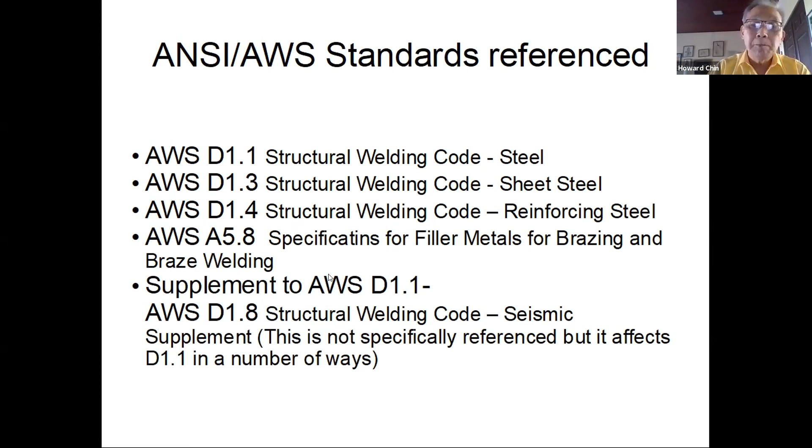This is from the IBC, International Building Code itself. This is a page around the back where it says reference standards. These are the AWS sections that are referenced. This part for the International Building Code is the structural parts: the steel welding, sheet steel, and the reinforcing bar.

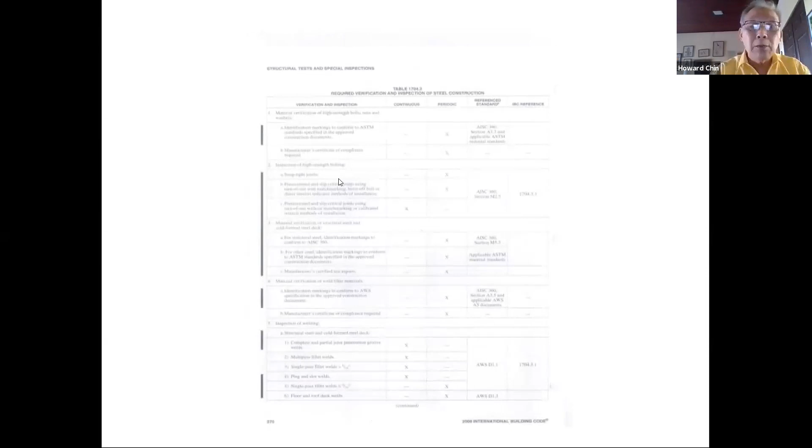The next page, this is from the body of the standard, where it calls for the reference. This is for sheet steel. The next one, if you look at the middle left, you'll see the structural steel requirement is there, and for the cold form steel and the reinforcing bar.

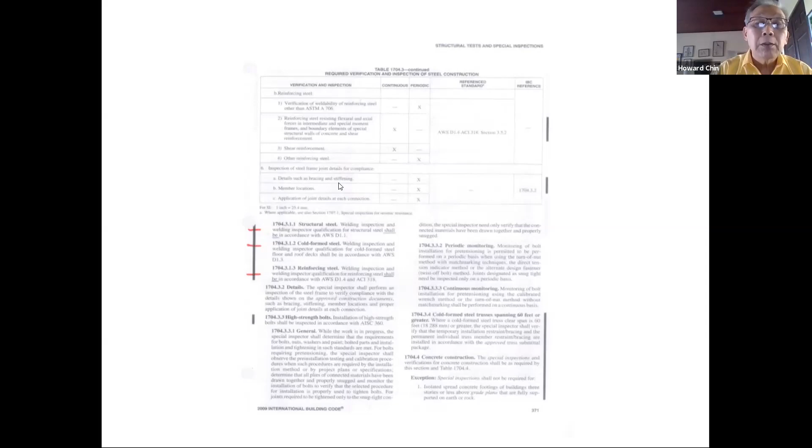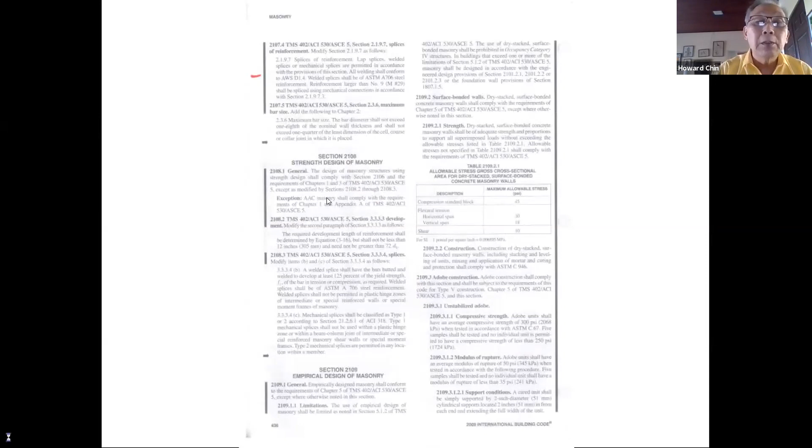Now, the other parts here, you have the reinforcing thing again on upper left. This is from the body again of the building code, IBC. And here we go into the International Mechanical Code. Oh, hold on, what is this? Okay.

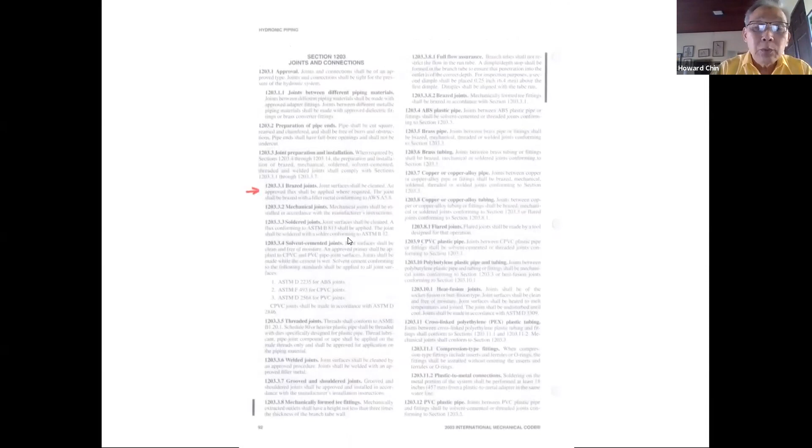It is used for braze joints in piping and tubing, but we're not really going to be looking at that too much. The next one is fuel oil piping and storage. You can see in the lower right-hand corner, braze joints.

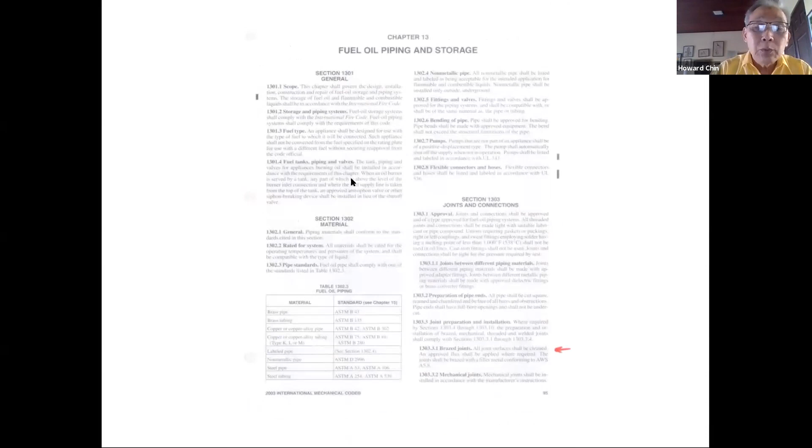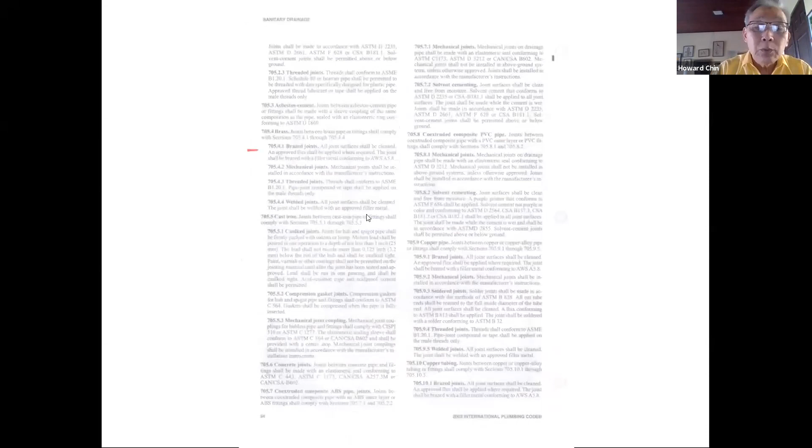Okay, now what are the consequences of this? The IBC calls for verification and inspection, and this requires certified welding inspectors, of which we have one, oh no, two at this time, possibly later three, if Dwight Lewis tests and becomes successful as a CWI. But the main thing here is that all of these forms here...

Structural steel, cold form steel, and reinforcing steel all say shall be in accordance with the relevant AWS standard. And as a part of that, the welders have to be tested as well to be able to do the jobs that are required in the various codes.

We're not going to have more cobblers around anymore. One of the things that happens is that right now in structural welding, a number of welders are tacking things onto the steel in all sorts of places, which is not necessarily accepted by the D1.1 structural welding code, because this can cause problems later on in the operational life of the building or structure. So there are a number of restrictions that will occur.

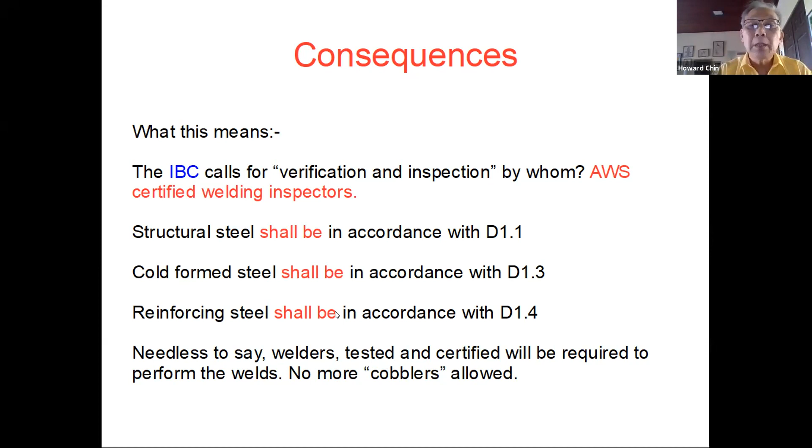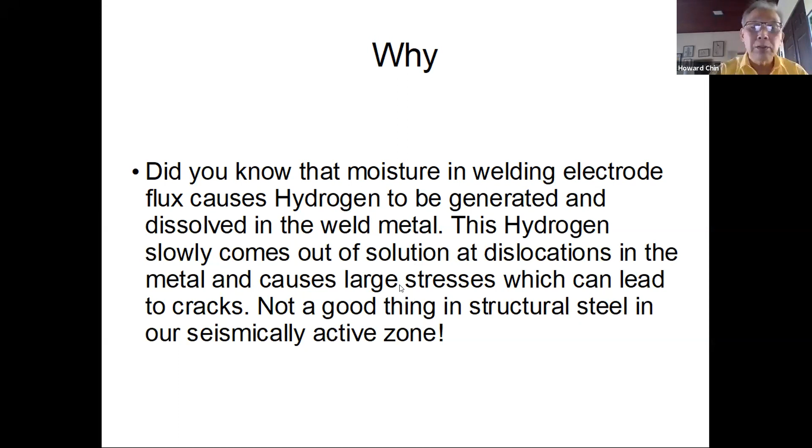One of the things that goes on there is hydrogen comes from moist welding electrodes, and this comes out at dislocations in the metal, and that is not a good thing in structural steel in an active seismic zone, which we're in.

Now the lessons to be learned from this are that over the years, D1.1 has grown physically in size. In 1988, it was 22 millimeters thick. 1989, 30 millimeters thick. And getting closer to the current day, 37 millimeters thick. And then you add on a mere 9 millimeters of seismic supplement.

Now the thing is, why is this? Earthquakes such as Northridge in California, hurricanes, and other problems that we've had cause changes in the building code.

Now one of the things you have going on is, for instance, I don't know if the current engineers in structures are using the dog bone treatment for beams. I don't know if any structural engineers are here. Anyone?

You can type in the chat if... I'm not seeing that, no one. Well, anyone? Maybe you could do, typing it in the chat. But you can continue in the meantime. Well, okay, that's the seismic problems for...

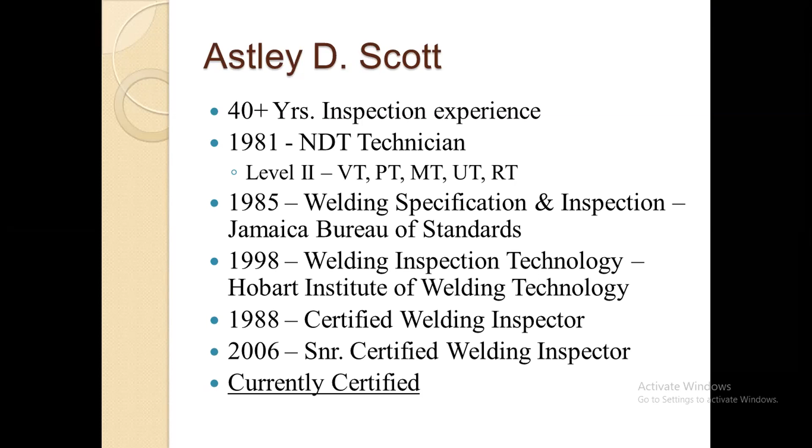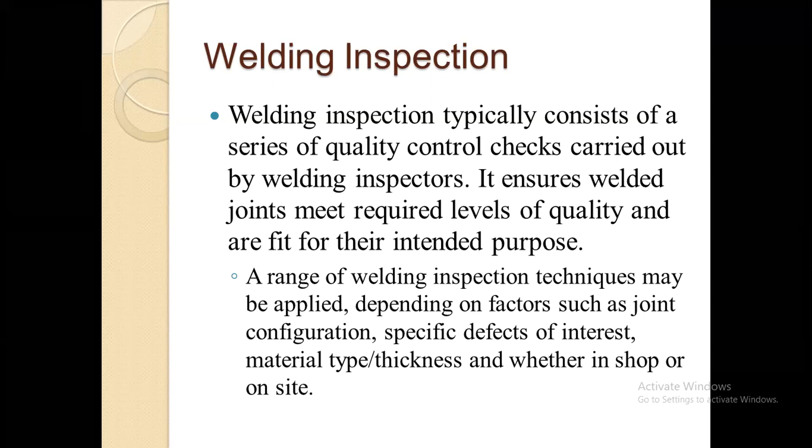Welding inspection typically consists of a series of quality control checks. These ensure that the welds are done to the required quality and are fit for the intended purposes. To achieve this, different welding inspection techniques may be applied depending on the joint configurations, the specific defects inherent in the type of material being inspected, the service, material type and thickness, and whether the welding is done in a shop or on a site which may have different kinds of contaminants.

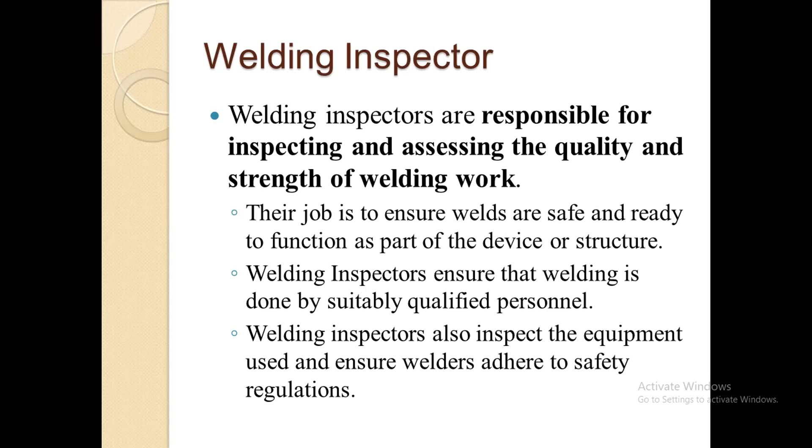A welding inspector is responsible for the inspection and assessment of the quality and strength of the welding work. The inspector has to ensure that the welds are safe and ready to function as part of the structure, and that the welding is done by suitably qualified personnel, done to the specifications approved for a welding project. Welding inspectors will also inspect equipment to make sure the right kind of equipment is being used, and ensure that welders adhere to all the safety regulations.

There are three different levels of welding inspectors: senior certified welding inspector, certified welding inspector, and as a subheading, certified associate welding inspector. I put that as a sub because there's not a separate examination for a CAWI - you become a CAWI when you sit the CWI examination and pass, but at a lower level than required for the CWI. Then you are known as a certified associate welding inspector, meaning you can do inspection, but you have to do it under the guidance of a certified welding inspector or a senior certified welding inspector.

You always have to be within sight or within earshot of a CWI while you're doing your inspection, if you're an associate inspector. That's a requirement. And these different levels are achieved through education, experience, training, and examinations.

Inspectors are really required to remain current, even though there are some codes which will allow the contractor to optionally use inspectors that are not current but have been certified in the past.

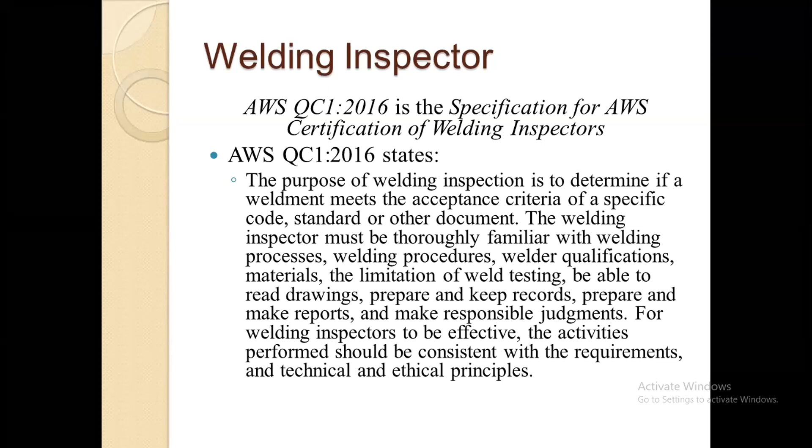It further states that the inspector shall act to preserve the health and well-being of the public by performing duties required of welding inspection in a conscientious and impartial manner to the full extent of the inspector's moral and civic responsibility and qualification. AWS is very serious about this, to the point where an inspector can lose his or her certification if it is proven that they have breached the ethical standards required for welding inspectors.

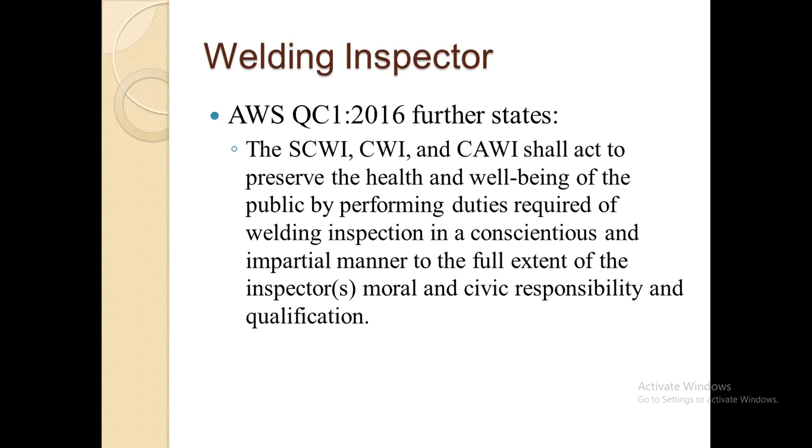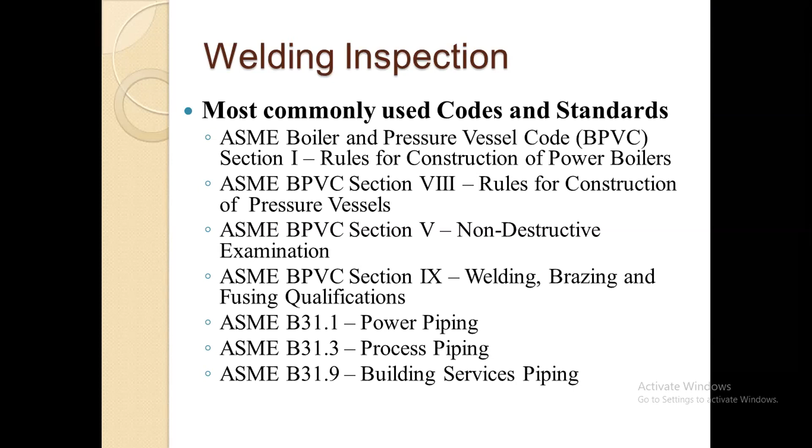Section 5 is widely used in non-destructive examination, that's one of the types of tests that uses welding. We have section 9, which is a qualification code that addresses welding, brazing, and fusing qualifications. There's B31.1 for power piping, B31.3 for process piping, and what would probably be more interesting to you is the B31.9, which is the building services piping.

Continuing, there are some API codes as well, which are widely used right here in Jamaica. API 1104, which addresses pipeline welding. The API 650, the welding of oil storage tanks. 653 has to do with the repair and alteration of storage tanks. And the API 510, which is the API pressure vessel inspection code.

And even though these codes are primarily for the oil industry, you will still find that API 650 and API 653 are widely used in other tank constructions as well, because similar rules would apply.

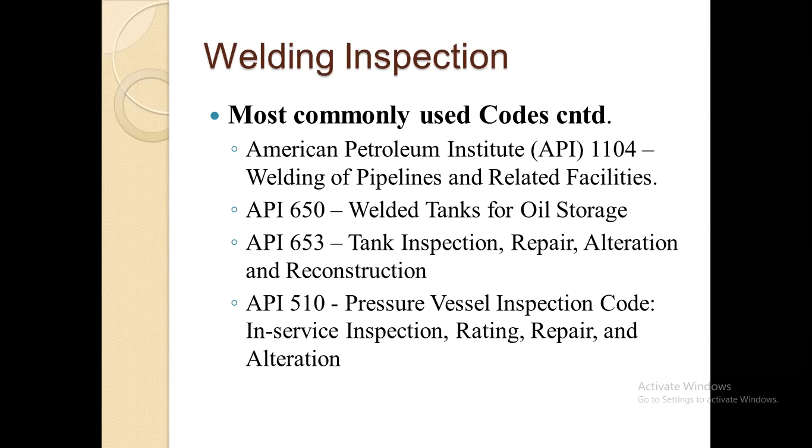To get closer to what we are about, now we have the AWS codes. There's B2.1, which is the specification for welding procedure and performance qualification. This is the AWS equivalent to section 9, which is a qualification code. There's the D1.1, the structural welding code for steel, and Howard mentioned the D1.8, which is a seismic supplement.

There's the D1.2, structural welding of aluminum, 1.3 for sheet steel, 1.4 for steel reinforcing bars. There's the D1.5, which is the bridge welding code. And the stainless steel code is the D1.6. The D1.7 is a guide for strengthening and repairing existing structures.

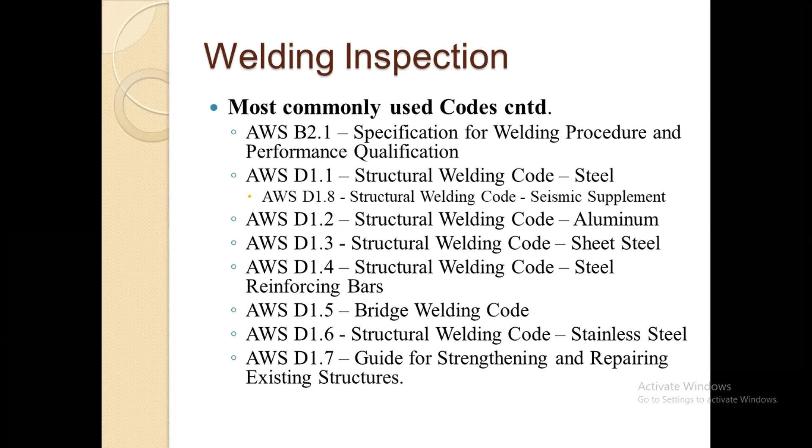I mentioned earlier that there are some things that will need to be in place whenever a weld is to be done. It should be in place first. Now I have here listed some important documents. The very first document here is the welding procedure specification.

This is like a menu, or rather a recipe as to how you're going to do the weld. So it states what material is being welded, how it is to be welded, the different current, the different positions, etc. And these have to be followed throughout a welding operation for a specific project.

Now, the procedure qualification record is a test that is done to ensure that the WPS can fit the requirements of a specific project. And then there's a welder performance qualification, which is a test done to ensure that the welder or the welding operator can use the welding procedure specification to achieve the quality welds that are needed for a specific job.

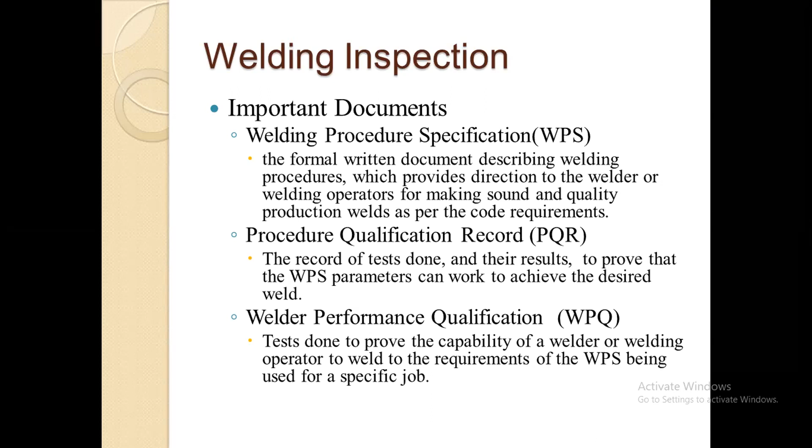While the code does not mandate the exact format for these documents, they do have some suggested formats. If you move away from those formats, you still will be required to make sure that all areas that are covered are also covered in the format that you are using. So all essential information required for a WPS, a PQR, or a WPQ has to be in whichever format you use, even if you put them in a slightly different order than the suggested format. They really call them suggested formats because no one is tied exactly to that.

There are some codes, especially the American Welding Society codes, which allow for the use of pre-qualified welding procedure specifications. These are WPSs that the American Welding Society has gone through all the testing processes for. For each one, they probably have 20, 30, 40 different PQRs that they've done before getting to the final document. These they sell to industry, which minimizes the number of WPSs you have to do on your own. But there's a requirement that when you use these pre-qualified codes, you have to test them to make sure you're able to use them as they've been designed.

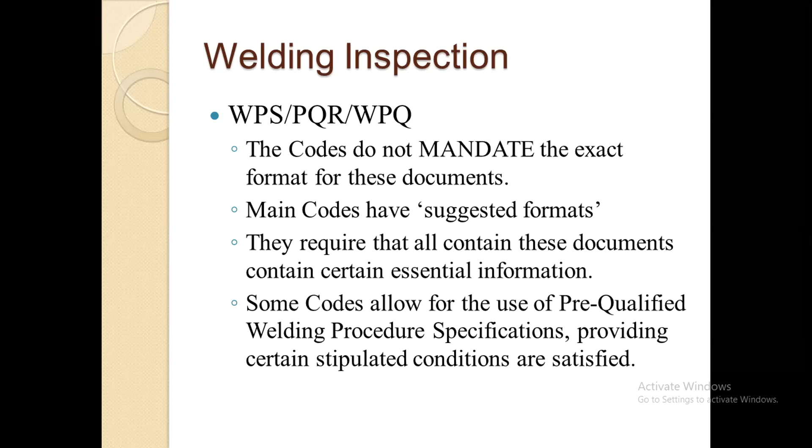I have here a list of the different suggested formats from ASME and AWS.

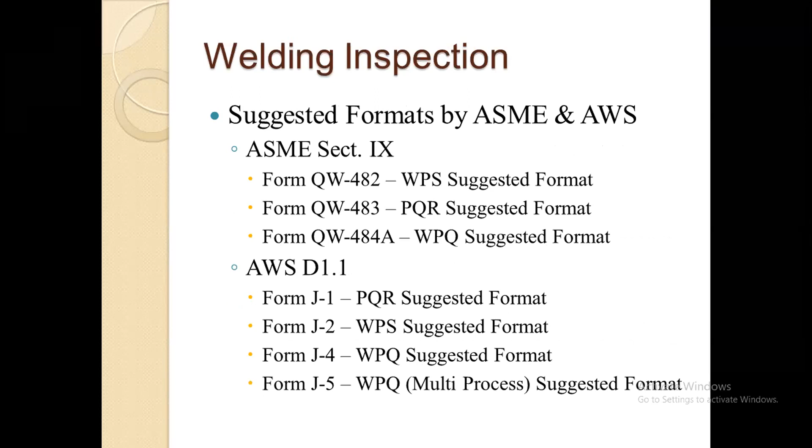In welding inspection, there are two different types of tests that are done: destructive tests and non-destructive tests. The destructive test, when done, renders the sample unusable afterward. Tests such as the tensile test are mainly used when qualifying welding procedures - you prepare the sample and pull it to breakage until it fails, and you make a recording of what is done. There's also the bend test, used in qualifying welding procedures and also in qualification of welders. And there's a Charpy test, which we don't normally use in our area - it's mainly used in the very cold regions of the world.

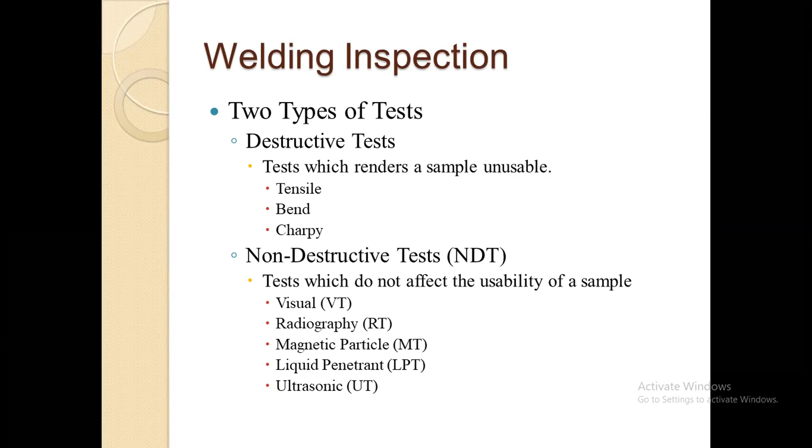There are also non-destructive tests, which do not affect the usability of a sample after testing. These include, but are not limited to, visual testing, radiographic testing (which we popularly call X-ray), magnetic particle testing, liquid penetrant testing, and ultrasonic testing. All of these are different NDT tests commonly applied to welding.

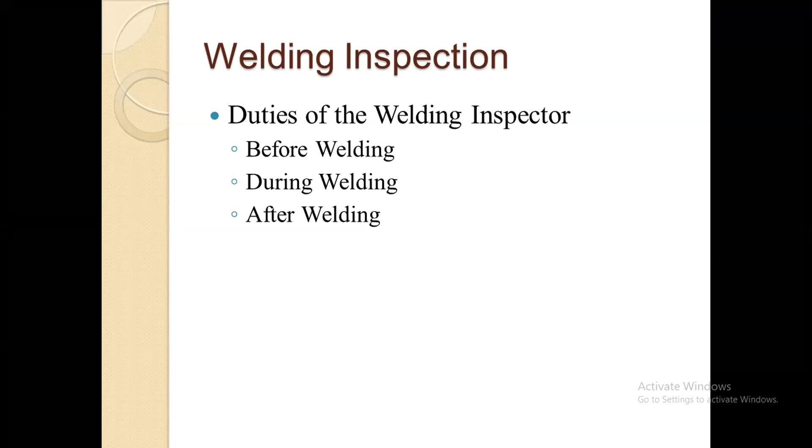The welding inspector has duties before welding actually starts, during the welding, and after the welding process has been completed. Before welding, the inspector has a responsibility to verify that the correct material is being used in accordance with the WPS and the design drawings, and that the materials are traceable through the use of test certificates. The materials here are not just the material to be welded, but also what you're using to weld, which are filler materials. The inspector also has to make sure the materials are free from damage and contamination.

The inspector has to make sure that the WPS to be used is suitably approved and is available to welders and inspectors. I'll expand a bit more on that, because I have found in so many occasions a WPS is prepared, tested, qualified, and approved, and then it sits on a desk in an office, and the people out in the field doing the work never ever see it. It's like sending your cook out to cook something, or your baker to bake something, while keeping the recipe hidden from them. You're leaving it to chance. The WPS really should be available to the welders, the inspectors, the supervisors - all who are directly involved with the welding process - because this tells them what they are to do, how they are to do it, and often what the desired outcomes are.

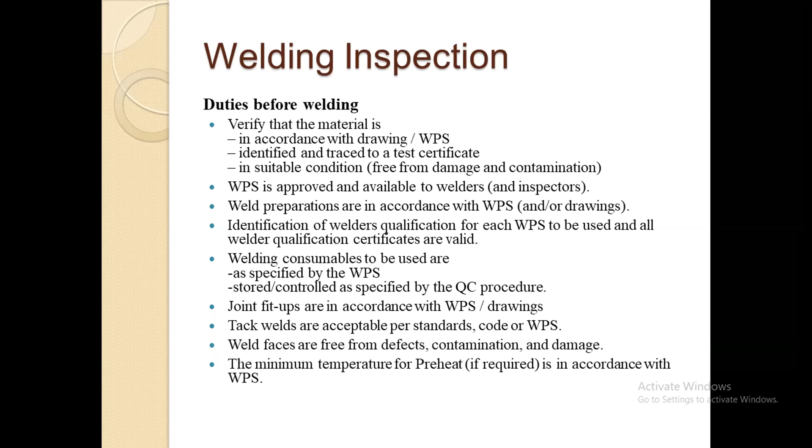So the inspector has a responsibility to make sure that what is being used is being stored and controlled properly. The inspector has to check the joint fit-ups to make sure they are in accordance with the WPS and the project drawings, that the tack welds are acceptable and up to standard, and that the weld faces are free from defects, contamination, and any damage. The inspector also has to make sure that, where required, the preheat and interpass temperatures are maintained within the required ranges.

Duties during welding: the inspector has to ensure the weather conditions are suitable. Just two days ago, I was testing some welders at a facility. They were working outdoors and it got very windy. I had to stop the test and move it indoors. There are some conditions you don't want people welding under, and this is not just limited to wind, but certainly includes rain.

The inspector has to ensure that the entire welding process is in accordance with what is specified by the WPS. Remember, the WPS is the document that instructs the workers how the weld is to be done. The preheat has to be checked to make sure the minimum preheat temperature is maintained. The interpass temperature, where specified, is to be checked and maintained. The welding consumables must be the right ones and controlled as required.

The welding parameters like current, voltage, and travel speed must be within what is permitted by the WPS. It's not what a welder thinks he should use based on his experience, but what the WPS specifies as the range for that size electrode. So that is what has to be used. The inspector also has to check the root run to make sure it is acceptable before the weld is continued.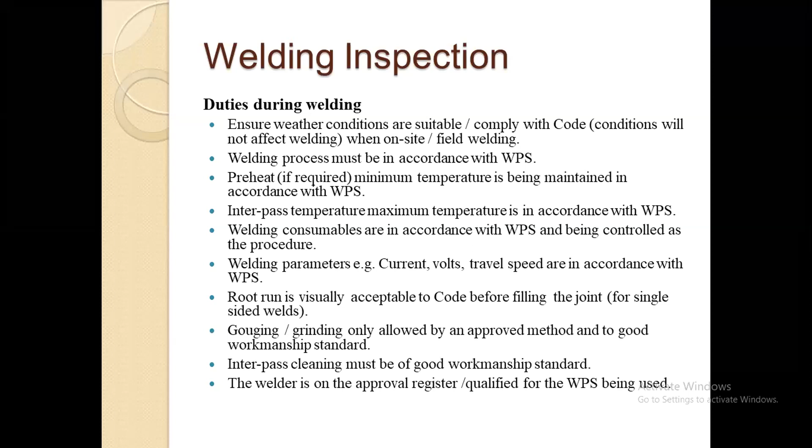After welding, and some of this may take place during welding as well, each weld is to be marked for identification. We don't practice that a lot, but it is good for traceability, because you don't want to find, after a job is done, that ten joints failed and you don't know who did them. It might be one welder responsible for all of this. So this is important for contractors to know, and this kind of record must be kept.

Inspectors ensure that the weld appearance is suitable for all NDT, the profile is correct, the cleanliness is okay, and the inspector has to visually inspect and assess all welds, because they don't go on to further NDT tests until they have passed the first and most important inspection procedure, which is the visual inspection.

The inspector has to check and ensure that the dimensions are in accordance with the drawing and the code. The drawings will specify certain weld sizes and profiles, and sometimes how the profile should be finished. So the inspector has to make sure that all that is being done is done according to what is in the drawing and what is allowed by the code.

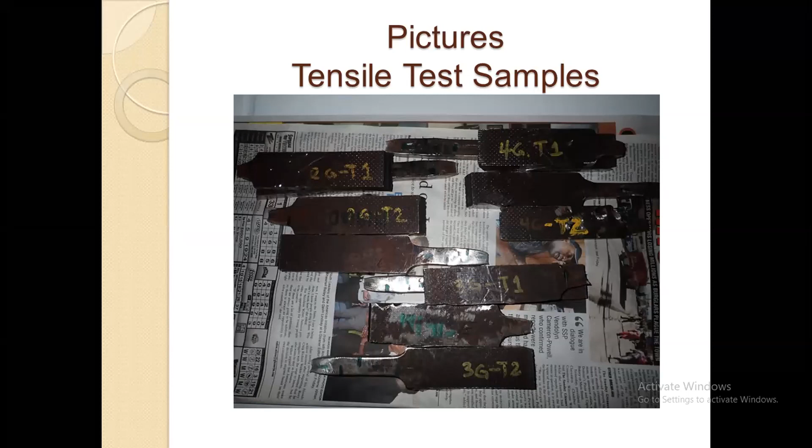These are pictures of some local things. This is a picture of some tensile testing that I had done in preparing a welding procedure for a local contractor. The tensile testing was done at the Bureau of Standards.

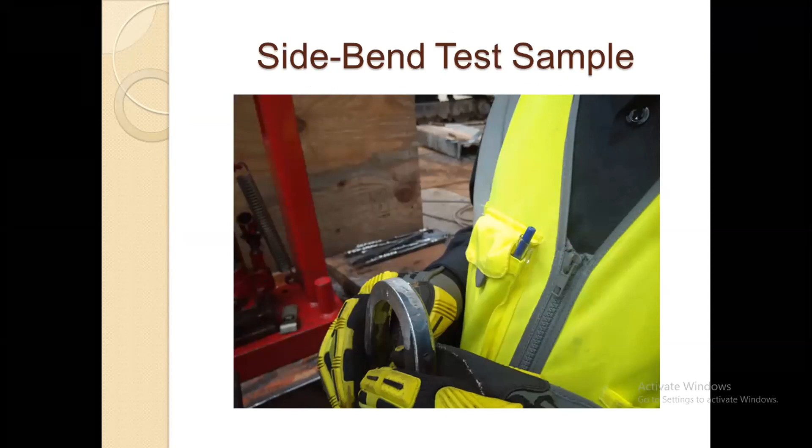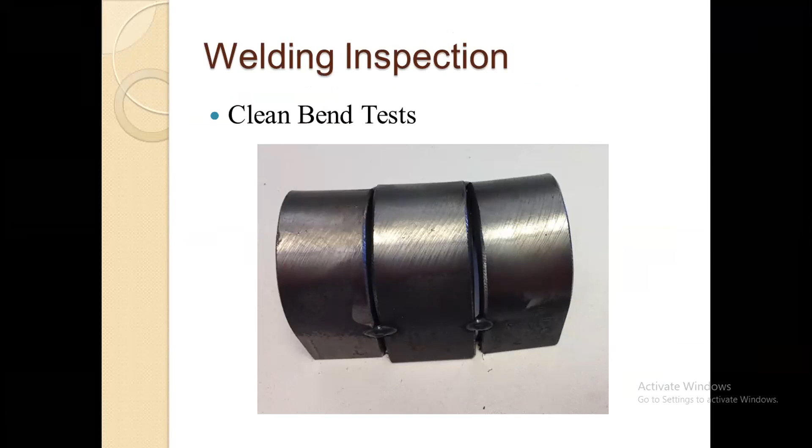This picture shows me looking at a side bend test that was done locally as well. This is not a local image, but this is what a face and root bend transverse bend test looks like, and this is used for the qualification of welders. This is me as the inspector, and another inspector.

This inspector is from Venezuela. We're doing some measurements and some welding tests. It was some submerged arc welding test that was done, some fillet weld tests.

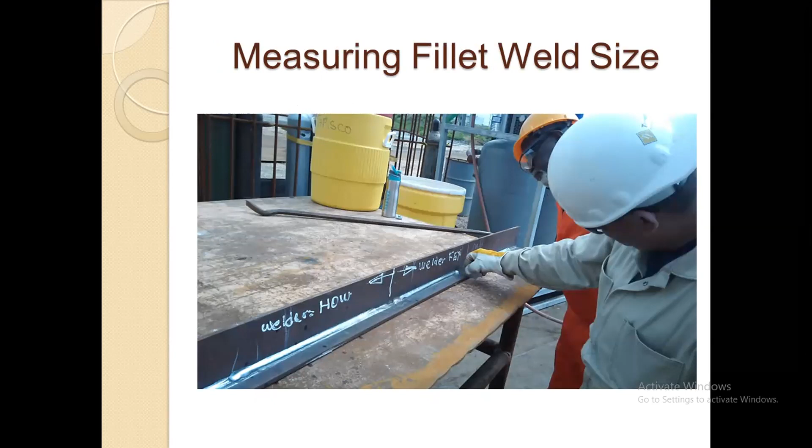Let me just move on. This is some welding that was done at a project in Montego Bay, and some NDT was done. You're not seeing it clearly on the image, but the arrows are actually pointing to the cracks that were shown up by the NDT that was done. Magnetic particle testing was done in this case.

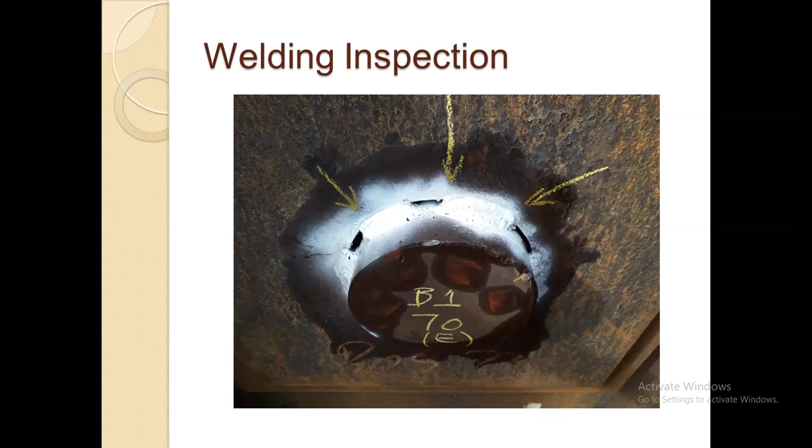You can see it a little clearer there now, that red line, which is the crack zone.

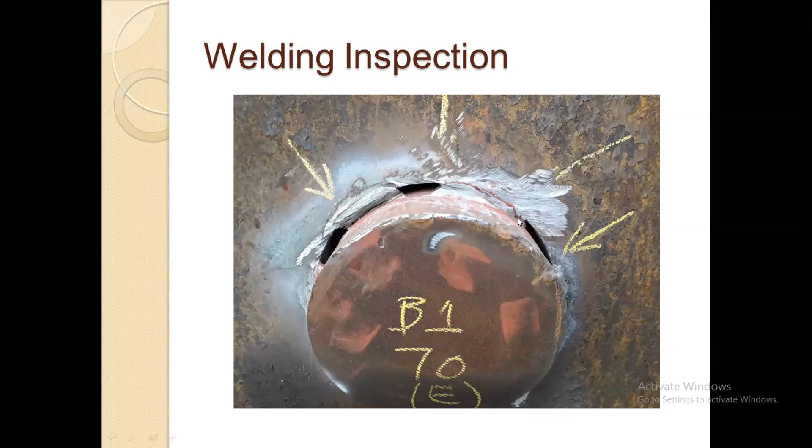Now, what we have here is a building that went up. The owners noticed some things that they did not like, and they asked for inspection to be done. And this resulted in almost all the welds having to be done over. The welds, this was for a roof support structure of a building here in Jamaica.

Normally, just walking by, you wouldn't be able to see these kind of defects. A lot of the welds were done locally, most of them. Some were done overseas and sent here, and even those had to be done over, not entirely, but the majority of them were smaller than the size stipulated by the drawings, and the quality was another problem.

I'm sure you can see. Well, Howard mentioned something about cobblers. That was probably done by one of those type of persons. But we won't get away from it unless we have the inspections done.

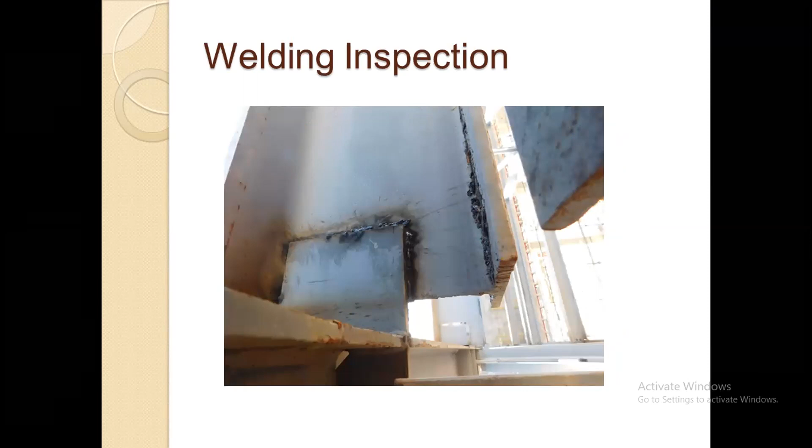A lot of these things would have gone unnoticed because it's all the way up here in the roof structure. Nobody walking down, and once they are finished, they would put up the ceiling, and nobody is the wiser that this is what is holding up the roof. This is the kind of thing that was happening.

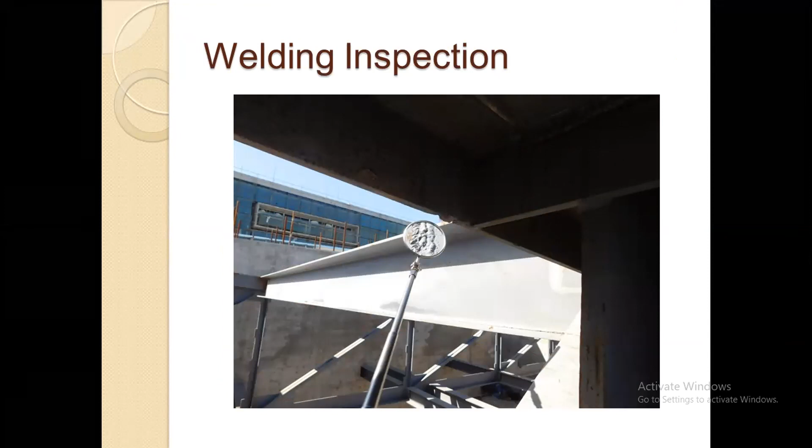Very bad. I won't say what project it is, because it's a project right here in Jamaica. But as I said before, the majority of welds had to be done over. They were done over by a local contractor.

In this case, this was supposed to be a beam that was to be spliced, and they didn't fit it properly, so there was excess space, and they used rebar to fill the space and then weld around the rebar.

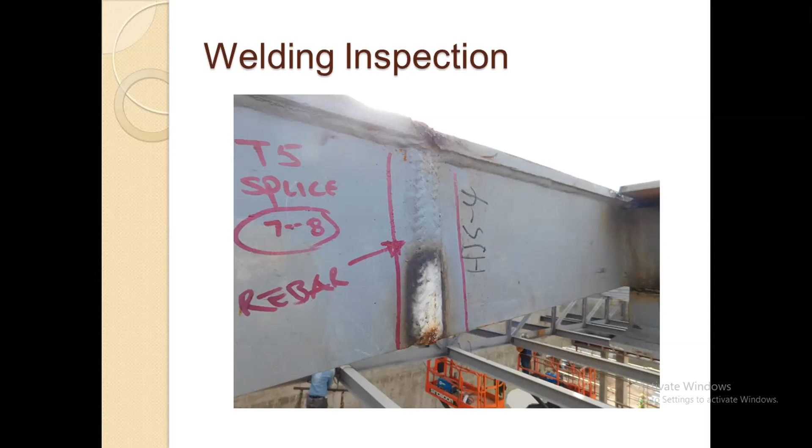And again, this was all the way up there. You would normally never see this. And all this could happen because there was not a welding inspector on the job who was there monitoring what was taking place. The welding inspector in this case was only called when someone noticed something awry.

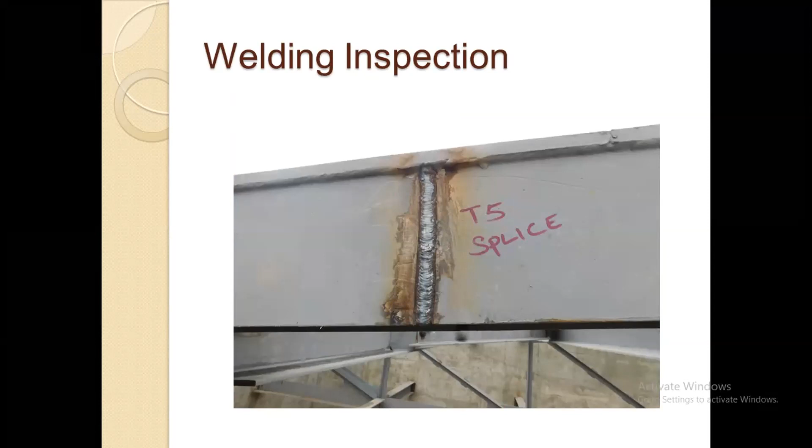This is one of the joints that was done over by our local welders. And the fact that I said local should make you realize that a lot of the welding was not done by local people.

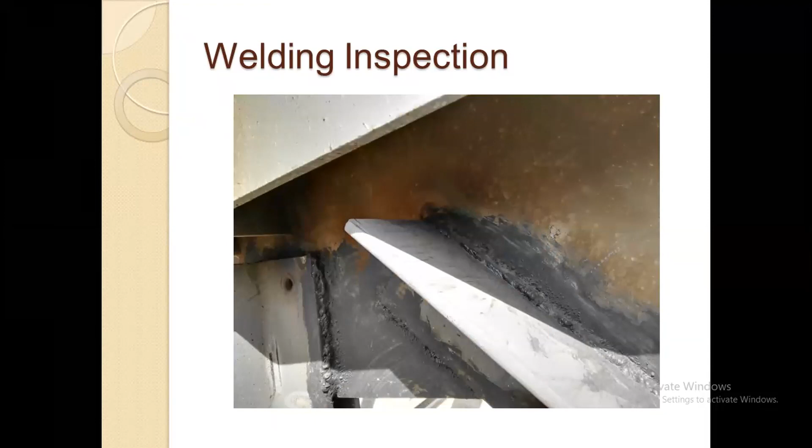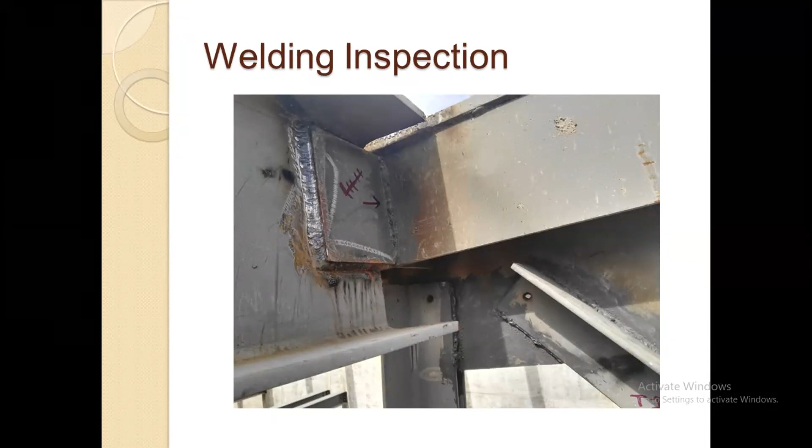This is the kind of thing that was happening. This weld was a weld that was done over as well by our local people. You see the red arrow there pointing to another part that still needs to be done over. The weld was below the specified size, and the profile was not of the profile that is acceptable.

And you will see some of these welds were actually already painted. So they were all completed as far as they're concerned, ready to put up the ceiling to hide all of that. And remember, as Howard mentioned, we are in a seismically active zone.

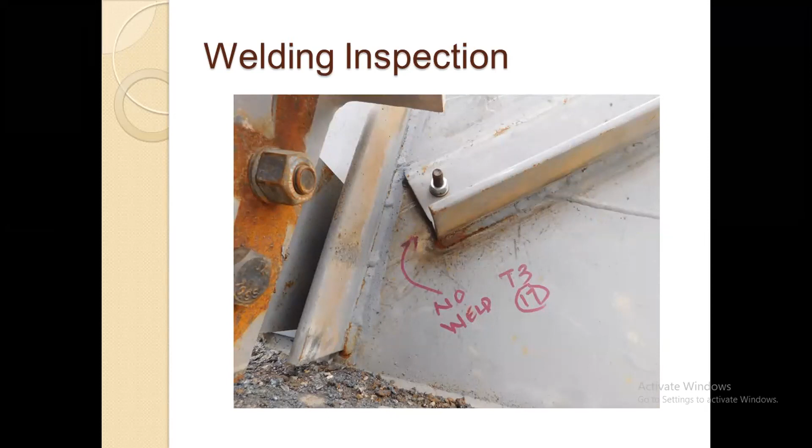The arrow is pointing to a part that the drawing says should be welded, but they welded the two sides and did not weld the end as required by the drawing.

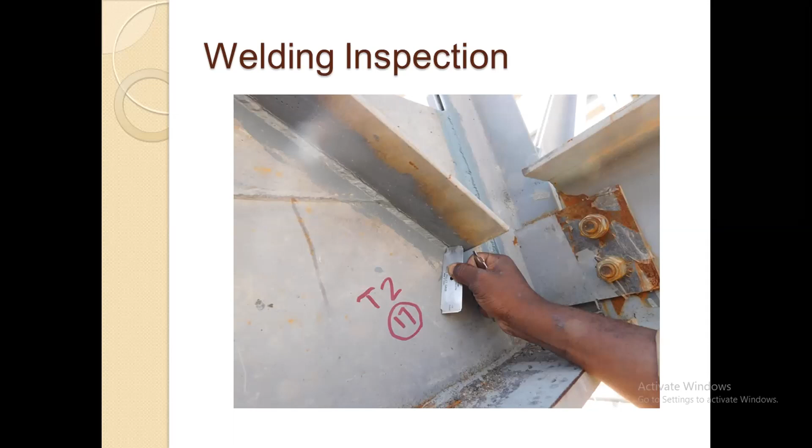I don't need to say much about that. You can see for yourself.

This is another project here in Jamaica. This weld was designed to have a backing strip, and they welded it without the backing strip, and this is what was happening.

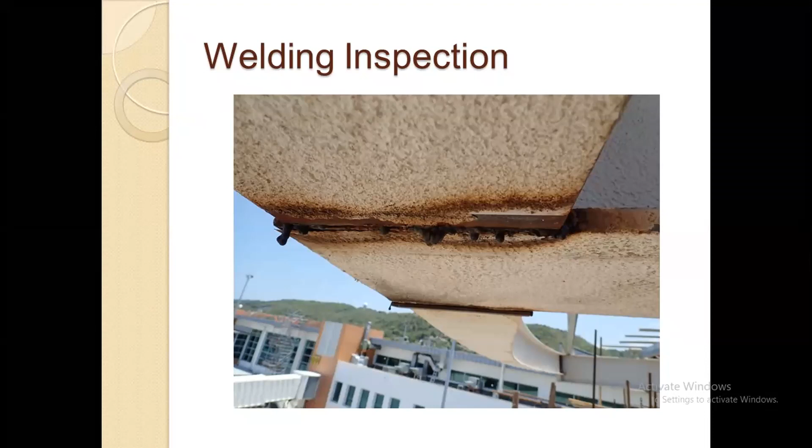This too was a roof structure, and you'll notice the paint close to the weld. The paint was not cleaned off from the weld zone. The code calls for at least an inch of clearance between the area to be welded and the paint, and this was not done.

This weld should have been a full penetration weld. You can see that it did not come all the way through. Again, no inspector was on the job.

This is another joint where the weld did not come through. You can see it in the mirror there.

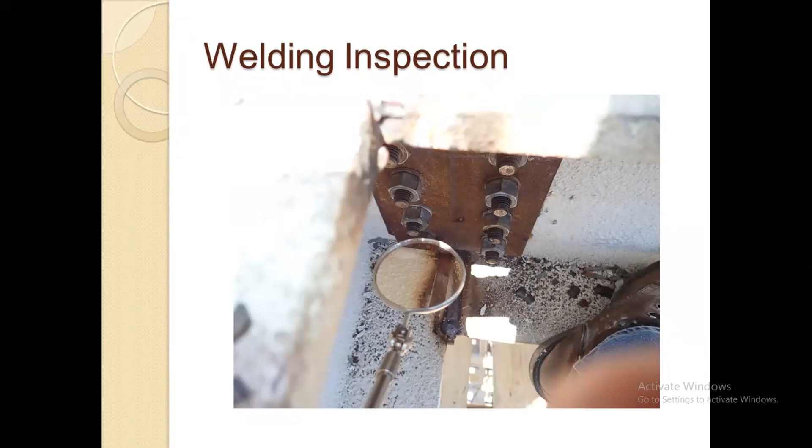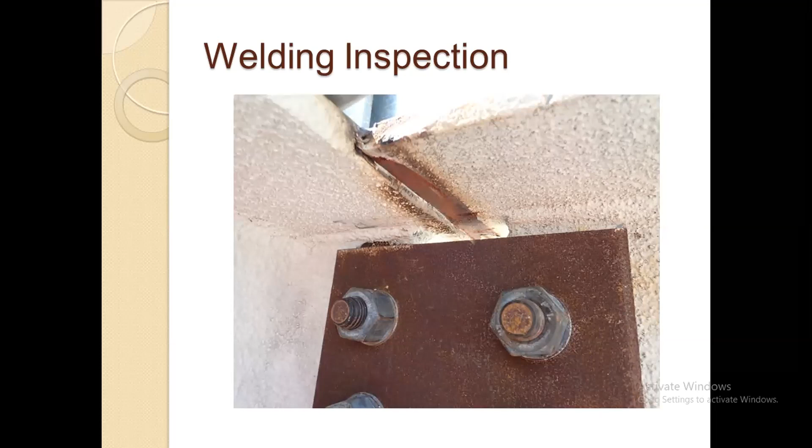Same thing here again. The paint is right there, right next to the weld, and the weld has not penetrated all the way through.

This one they had done over, but they still had a crater at the end. They did not have that runoff tab that Howard mentioned. But even without the runoff tab, a suitably competent welder should be able to fill that crater without leaving it there.

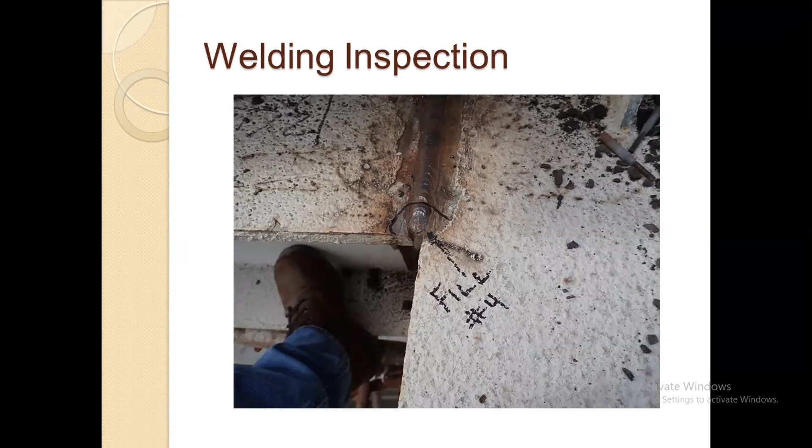That's a gauge being used to measure the reinforcement height of a weld, of a groove weld.

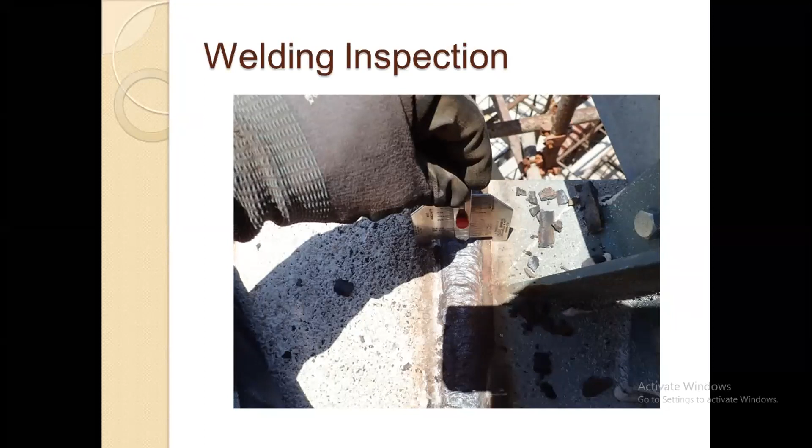This is the underside of a weld that should have been a full penetration weld.

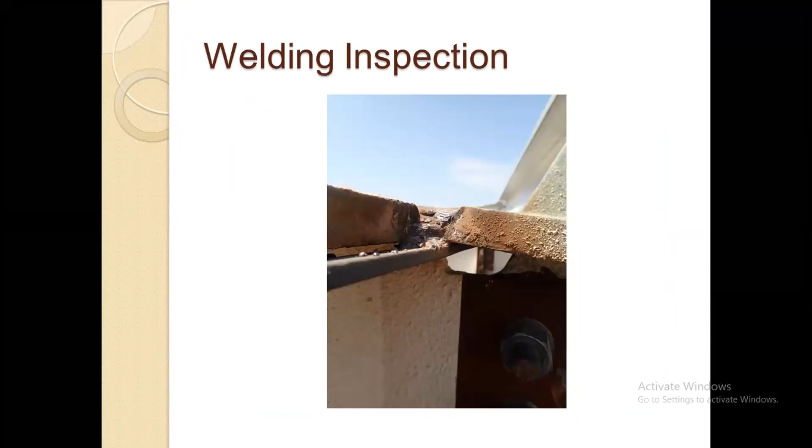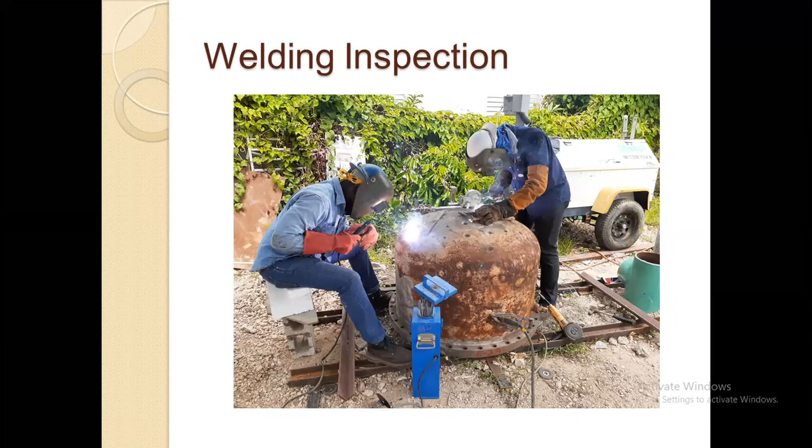Well, these are some of our welders doing weld build up to a part that belongs to Petrojam. So some pressure vessel repairs.

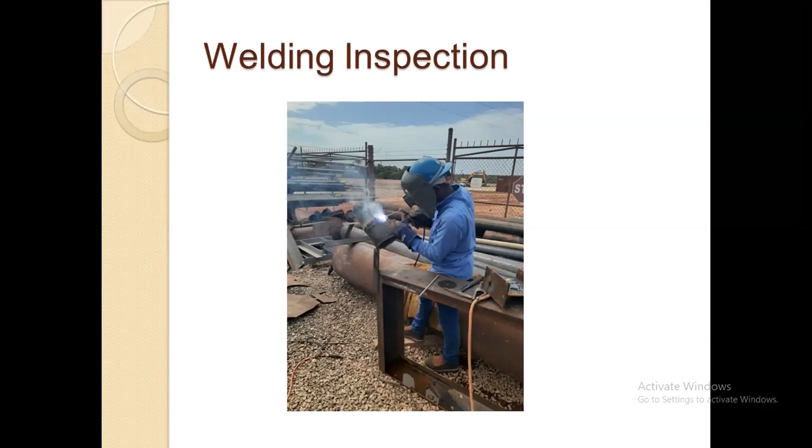That's an NDT inspector doing the inspection on a job here in Kingston. I think this was at the cement company.

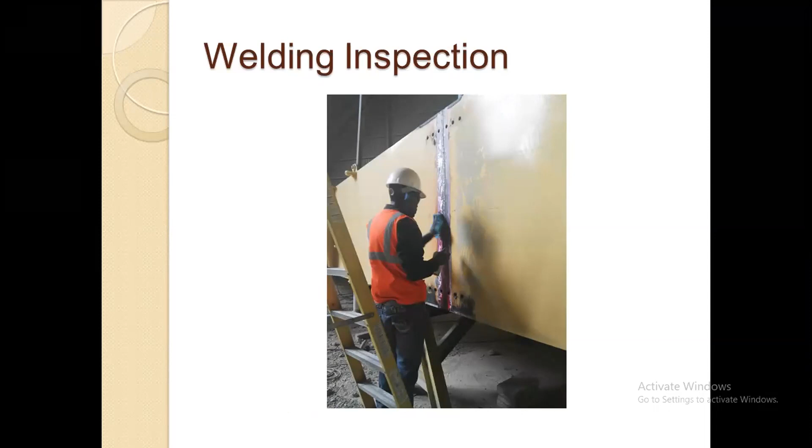And that, gentlemen and ladies, if there are ladies present, completes my presentation.

Howard mentioned that there are 2 welding inspectors here in Jamaica right now. The fact is that if we were doing things as we ought to, we would have a lot more welding inspectors. There's really one active welding inspector, and that's me. The other welding inspector is not finding inspection work right now and has resorted to teaching.

We really need to get this kind of thing going the right and proper way, so we don't end up with people being sued. As Howard mentioned...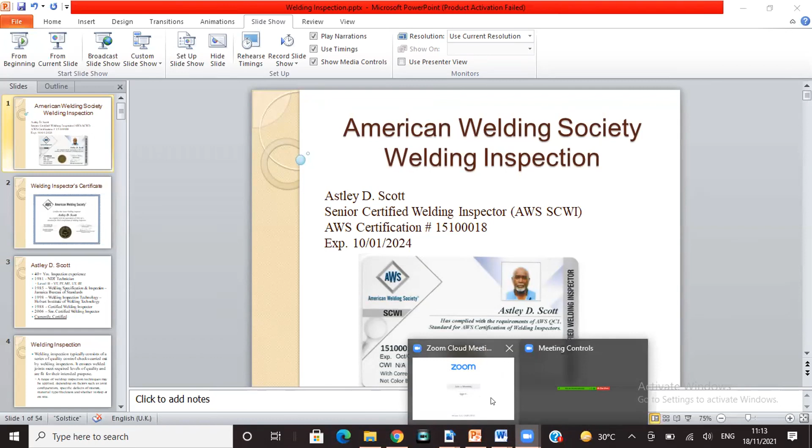Those 2 buildings I showed you images from, they could have reached a point where they failed because of the quality of work that was there.

Astley. Yes, I'm trying to get back to my point, right. One of the other things that might happen there is if the insurance company looks at something like that has failed...

And the welds are not proper, they could say, hey, this was not properly done in the first place, so they could avoid paying out for the repairs or replacement, which would not be a good thing for the owner.

Mr. Scott, yes sir, a very good presentation, man. I really appreciate it and enjoyed it. But it begs a lot of questions in my mind.

Firstly, with only 2 certified welding inspectors in Jamaica, what is being done to increase the amount of welding inspectors that could give good coverage?

The next thing is, when you do the repairs, do you have to come up with, or recommend, or ask the contractor to come up with a methodology to do the repairs, or do you just wait until they finish and then do the inspection?

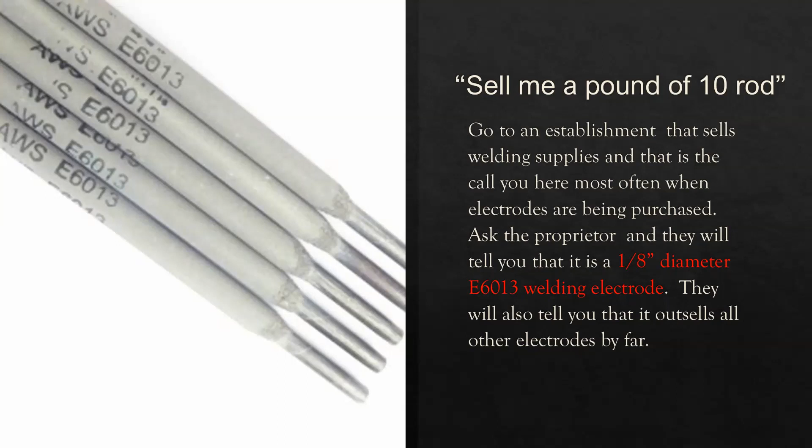What he's exposed to basically reflects what the welders will use, the power plants they sell, once it's within the budget range of the cobblers, or the welders, for want of a better term.

So where did we come from? Where did this all begin? It all began in the country's largest industry at the time, which was sugar. Sugar factories are large steel buildings. They have large machinery, gantries, walkways. Everything is steel. Sugar factories are also power plants, if you didn't know that. During harvest time, they burn the bagasse and run turbines, generate electricity for themselves, cut off JPS, and so on and so forth.

Of course, with sugar factories came British people. British people, their mannerisms, how they deal with workers, their processes, their policies, their biases, and the technology. The most poignant to us is the AC transformer welding plant. Most welders out there use an AC welding plant, and how it affects how they weld.

Their attitude towards what they weld, what they choose to weld with, and their whole mindset. It becomes obvious, as most engineers know, the tool you use determines the product that comes out at the end. You shouldn't blame a tool, but in this case, a lot of the time, not only the tool being the welding plant, but the electrode you choose, how you keep it, how you prepare the metal, how you maintain temperatures during welding - all of this matters.

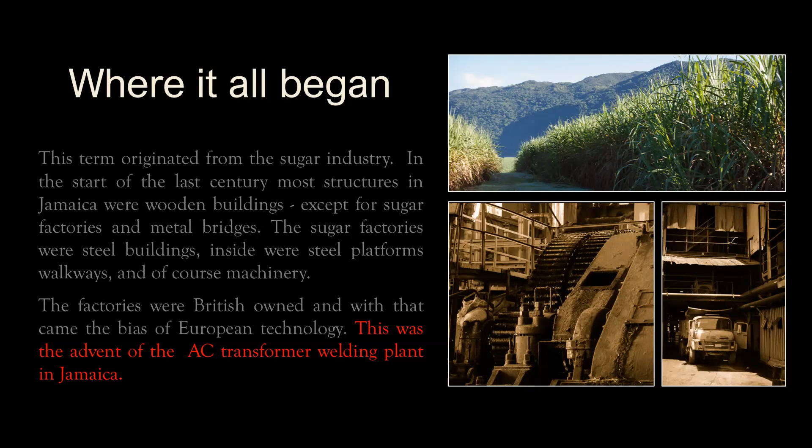So moving along, where did number 10 rod come from? Why specifically do we keep this terminology? Well, back in the day, and it still goes back to the factories, the number rods, the electrode diameters, were associated with the thickness of sheet metal or metal that you were supposed to weld. So it's been passed down from generation to generation.

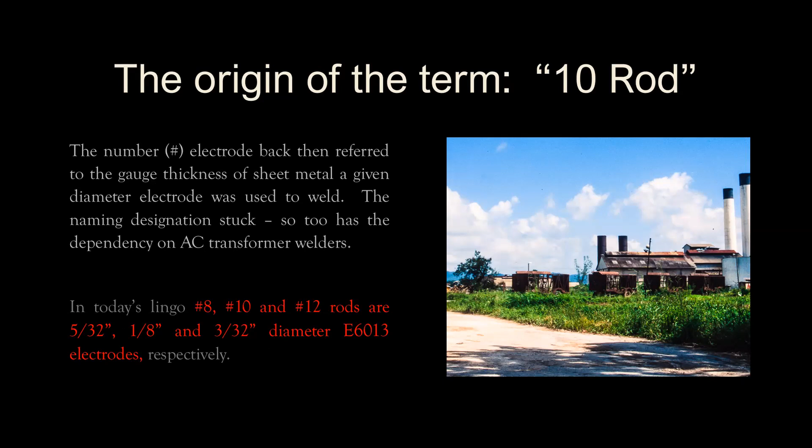So as you can see, number 8 is a 5/32 rod, a number 10 is a 1/8 rod, and a number 12 is a 3/32. Always know it's associated with E6013.

Now, why E6013? Why is it so prevalent? One, they're readily available. Like I said, the proprietors don't want to rock the boat. They make money, it is their bread and butter. You can't wrong them. They're not in the business of weld stability, structural stability. They're in the business of making a profit. E6013 sells, so sell E6013.

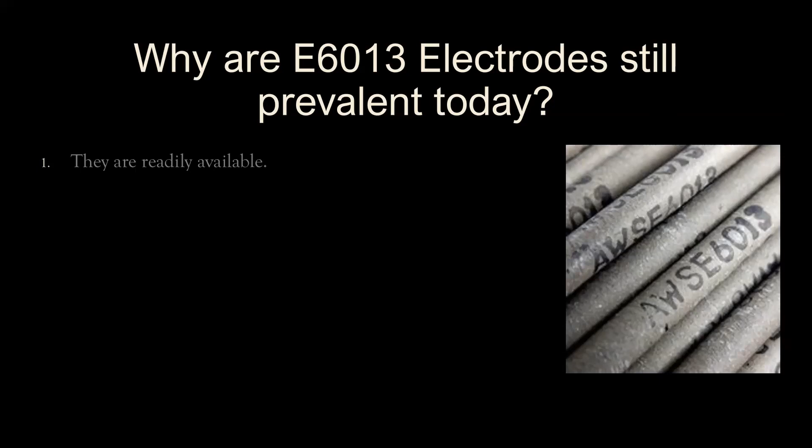They don't need to do promos like Pepsi or Red Stripe or anything - the better drink, the stronger this, the more caffeinated, whatever energy boost. Nobody advertises this is the stronger, better electrode. No one does that except the welding companies in the US. The electrode works on machines, and I'll go into the machines a little later, that the welders currently have.

It's scary, the machines that they have and actually use, but most of them use something else. I'm speaking about a spectrum of welders, not structural welders. These are all the structural welders, these are all the TIG welders, these are me. Across the board, volumetrically, there are a whole bunch of grill men, cobblers like Mr. Chin keeps saying, a whole bunch of little guys that do smaller work. Unfortunately, they filter into the contractors' field of view because they work cheap.

The other thing is E6013 doesn't require special redrying or storage conditions. Most electrodes used for structural welding, the low hydrogen electrodes, require special storage. They come sealed, and once you break the seal, most of them you have up to 30 minutes to use under normal atmospheric conditions - not rain, not snow, well we don't have snow but just saying. After 30 minutes they start to lose their chemical properties, and you have to dry them in an oven. Mr. Scott mentioned contractors don't even want to buy the oven because that's another cost - you have to run electricity to it on location. And then the electrodes can only be rebaked once, after which they're basically trash.

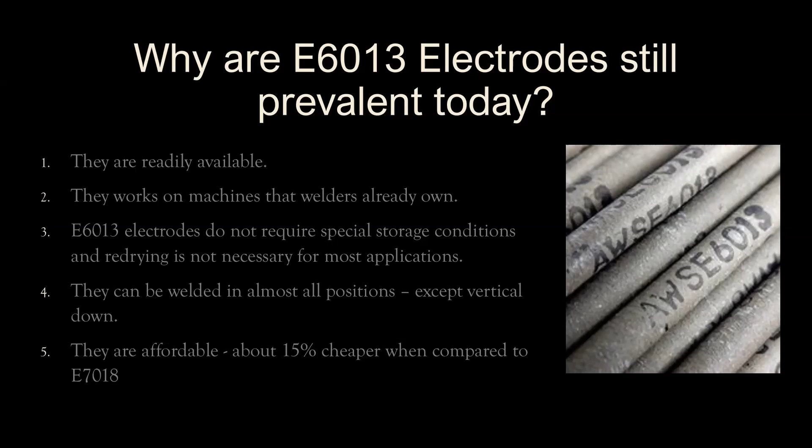So moving on, the shift. We are now seeing in our modern era, away from sugar and its infrastructure - the machinery, the field machinery, the buildings and so on. The shift in Jamaica came about through the bauxite industry, as mentioned before by Mr. Chin, and the power company. So it started with them - that was before Petrojam. I think Petrojam before was an oil refinery. So the main shift to North American codes, standards and practices came through the bauxite industry.

Welders were introduced to DC current welding, to cellulose electrodes like E6010, and to low hydrogen electrodes like 7018. More importantly, they were required to follow these codes, and inspection was necessary. Why low hydrogen electrodes? Basically, what does hydrogen do in a steel weldment? It causes cracking. The use of low hydrogen electrodes, the EXX18s - Astley can elaborate on other kinds - were necessary because structures could not fail, as that would be catastrophic. Although the gentleman mentioned nothing catastrophic has happened, and the last one was the bauxite company...

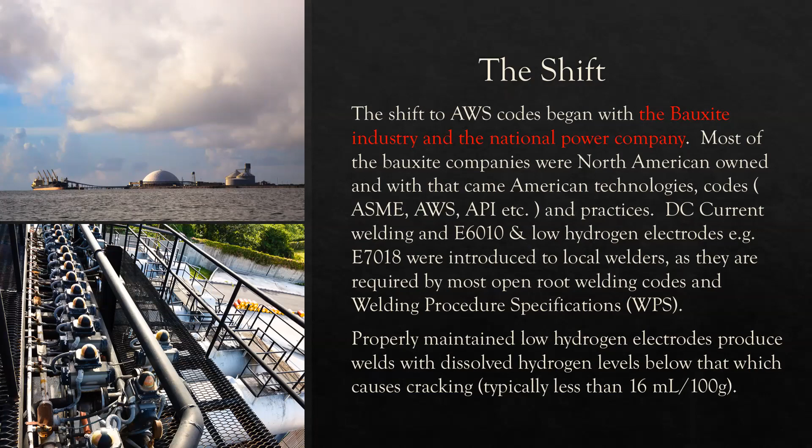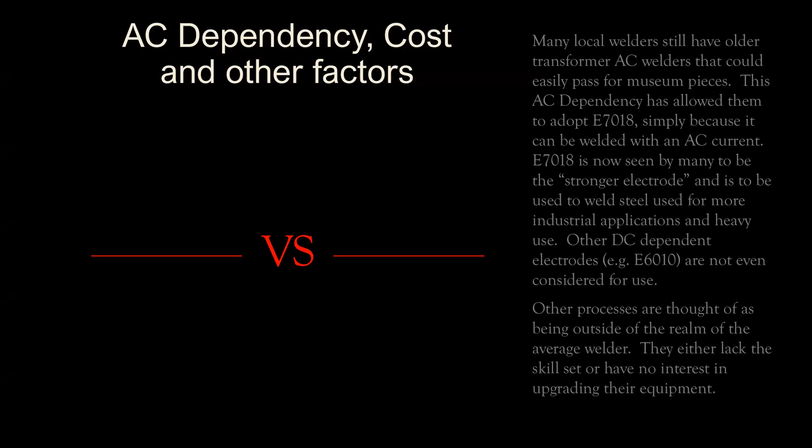And so what we think of a welder becomes important. Right now, we suspect a welder has this kind of equipment: nice European big red, big blue, ESAB - you can call the names out, Everlast, Kemppi from Finland - beautiful, modern machines. Unfortunately, that is not our reality. The reality is a lot of welding machines that the cobblers use are older machines, almost museum pieces, or if not museum pieces, they're old.

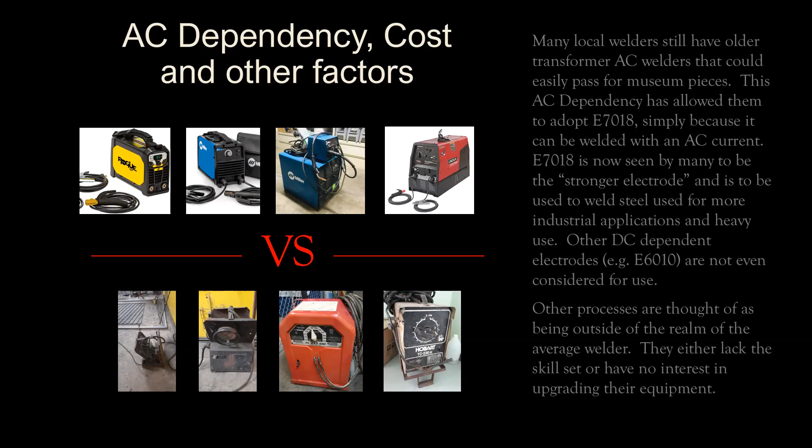Now, moving along, yes, there are newer processes. Mr. Scott mentioned submerged arc welding for the project he was inspecting. Companies and individuals requiring higher productivity have retooled and invested in flux core arc welding machines and gas metal arc welding machines, and continue to do good work. However, like with TIG welding, the acquisition of shielding gas tends to be an issue sometimes. If you don't have a stockpile of argon, you can't easily get a good blend, say 90% argon, 10% carbon dioxide, or 98/2, which you need for pulse spray GMA.

Oxyacetylene welding, another older process, is sometimes used by car bodymen. But the technology in car bodies has changed. A lot of bodies now are made with advanced high strength steel, AHSS, as they call it in the automobile industry. People are migrating away from using oxyacetylene because it cracks after a while, since the process has a high heat-affected zone. It causes annealing, the metal becomes softer, and increases the risk of cracking. On a car, that means structural failure, since a car is constantly in motion and vibrating. So a lot of body workshops are adopting flux core arc welding and gas metal arc welding instead.

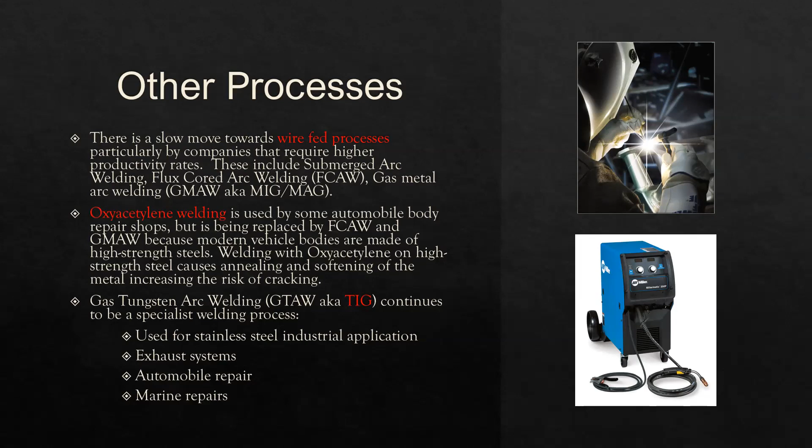When you do get the smaller tanks and you give it to IGL, it takes a month to three months to get back your tank. So you can't wait that long when you have a client bearing down on you and they have deadlines. So just weld it with stick, you know.

So the current situation overall is that HEART does training up to level 4, which is the national vocational qualification, and they say it's a management level. We as AWS are currently involved in the whole restructuring of the programs to be more aligned with the AWS.

The only AWS testing facility, welder testing facility on the island is housed at HEART's NTEI, down by Three Mile. As we stand, there are less than 100 welders AWS certified. However, AWS certification for welders expires every 6 months. And while an employer, and Ashley can confirm this, an employer can keep logs of a welder to say they've welded certain weldments in certain positions on certain types of material that will assist them in keeping their certification.

I'm not too sure how that process works, but most welders don't even do that. Most welders only get recertified on an as-needed basis. So if the contractor, the client, or the owner does not require them to have certification in a certain type of metal or position, it's again a 'not my monkey, not my zoo' scenario where they don't care. They will just go out and weld. And as Mr. Scott has shown, you see the results.

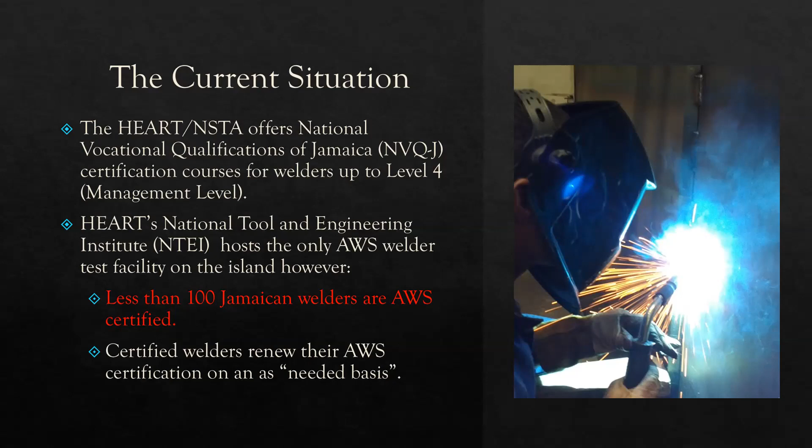So the way forward, where do we go? The number 10 rod cannot continue to be king. It's just a recipe for creating hazards. Our national building code has changed.

The JIE itself must be part of the drive for this change as well, in terms of attitude, in terms of sensitization of the public in general, because while you do have the owners, a lot of owners operate their projects or buildings like a black box. They get it from the contractor, they get the architect to sign off on it, they get the engineers to sign off on it. They are not out there every day walking around with the site men.

They don't know what a good weld looks like until it fails, unfortunately, or until it's absolutely certain that something is wrong. In whatever limited exposure they do have, they look up at the ceiling and say, well, that's not 90 degrees, or those things aren't butted together, those things aren't holding. At that point, there is reason for somebody in the public sphere to say there's something wrong. It shouldn't reach that point. And there are increasingly more and more of these buildings going up.

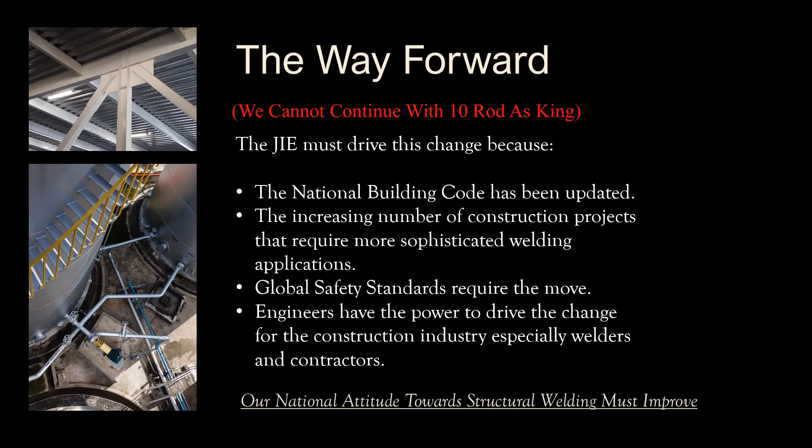Sorry, not a question, but just a comment, in support of what Julian said. Really, the JIE is well positioned to drive this change, because I'm sure that within JIE you have persons who are owners or work for owners, and persons who are contractors or work for contractors. So when the sensitization takes place within JIE, then JIE is in prime position to help drive the change that is required. Agreed.

Gentlemen, following up on what Scott said: we have certain standards and certain ethics we have to follow. So until we are very conscious of that and make sure that we follow it through, you're going to have problems. Because if an engineer design, and this is design that he comes up with, the contractor has to follow it, the notation and bring it to the owners, and then as Ms. Howard said, it goes straight up. So yes, we have power, but we have to make sure that we have power and use it.